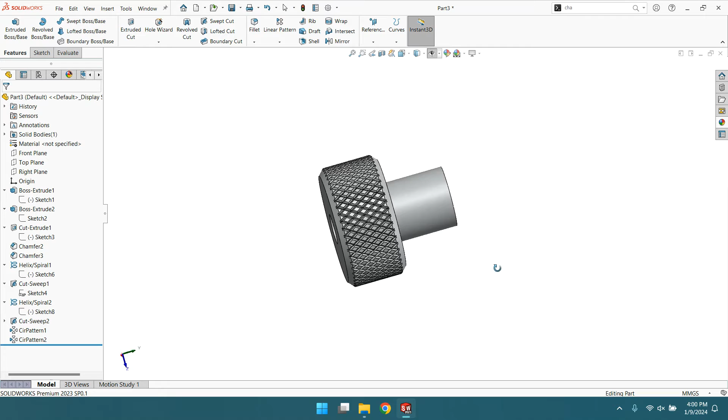Welcome. In this tutorial we are going to create this beautiful knurling in the cylindrical face of our object. Here I have already created this object to demonstrate how knurling helps in getting a good grip on any object in the cylindrical surface.

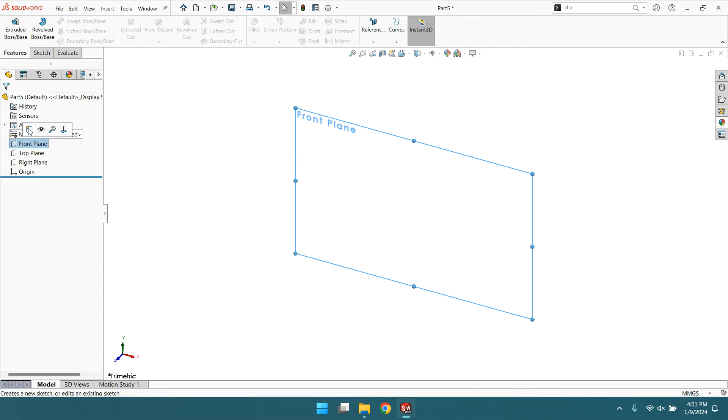Now we are going to create a new part file here. For this I choose the plane and go to the front plane or any other plane to create a cylindrical part. Just create a circle of radius - let's take the dimension, diameter 40, so radius 20.

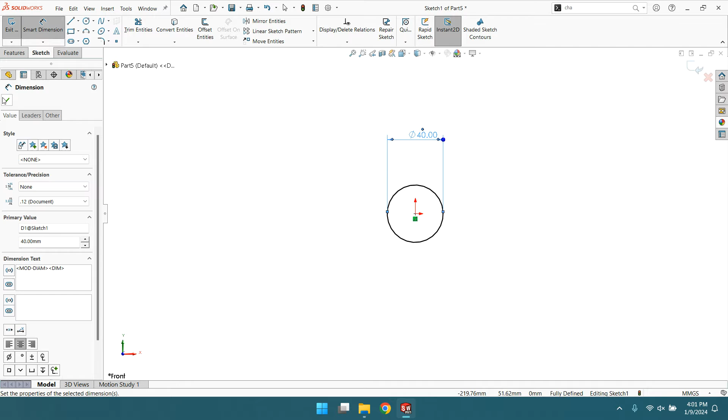Now go to feature and extrude it. You can choose any plane. I choose mid plane and extrude length, let's say 20.

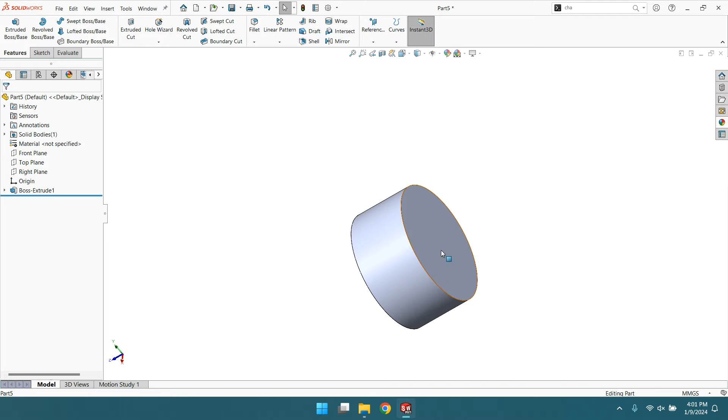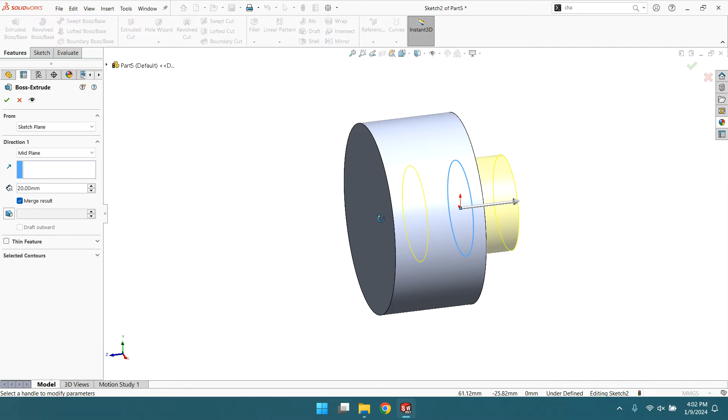Now go to this face, normal, and create another circle. It's just for the shape. Again extrude it, blind 20. Okay.

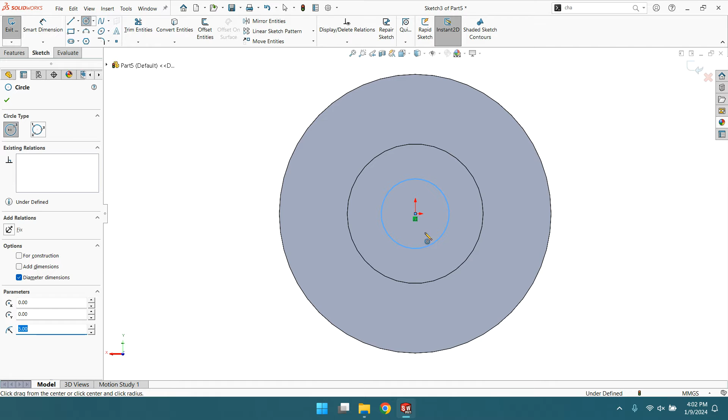Now go to this face and create a hole. The hole gives a specific shape. Go to feature and extrude cut up to through all. You can drag for the random through cut.

Now this gives an idea of this shape where we are going to create the knurling on this cylindrical surface.

Just go to the chamfer and give a 5 mm chamfer. Click OK.

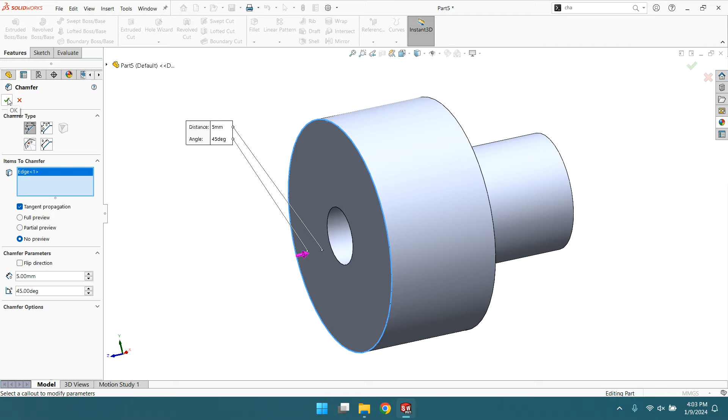This one looks - let's say it's a 2.5. Click OK. Give this side also the 2.5 chamfer. You can always edit as much as you want.

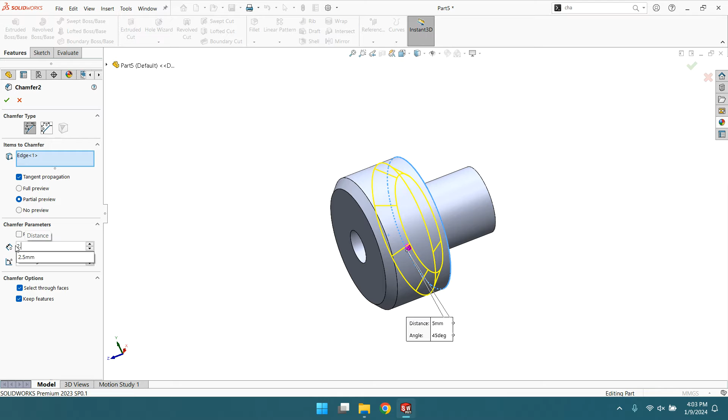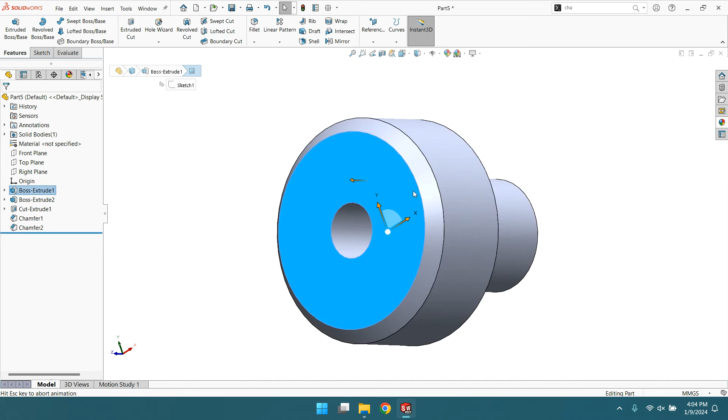Now we have to create a profile and path to cut the knurling. So let's go to this face, normal, and create a base circle for the helix.

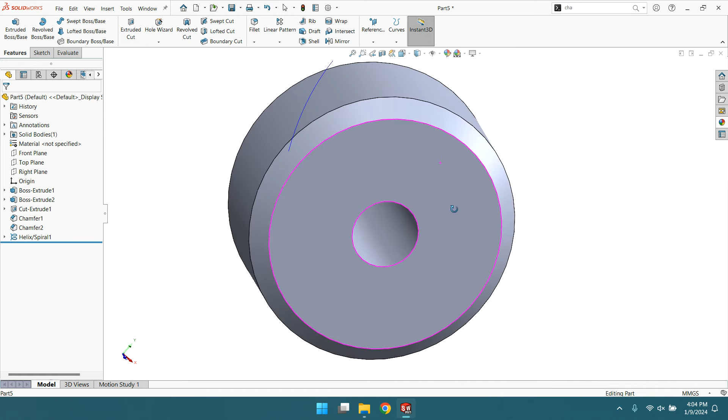Now go to feature and create a helix. Provide the height 20 as it is, pitch is 200, and clockwise direction. You can see the helix path.

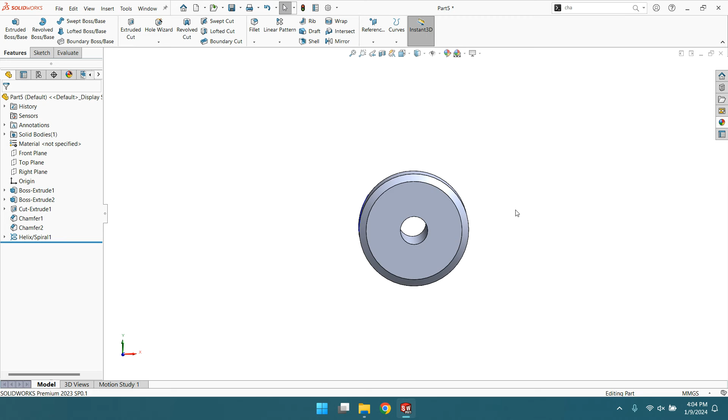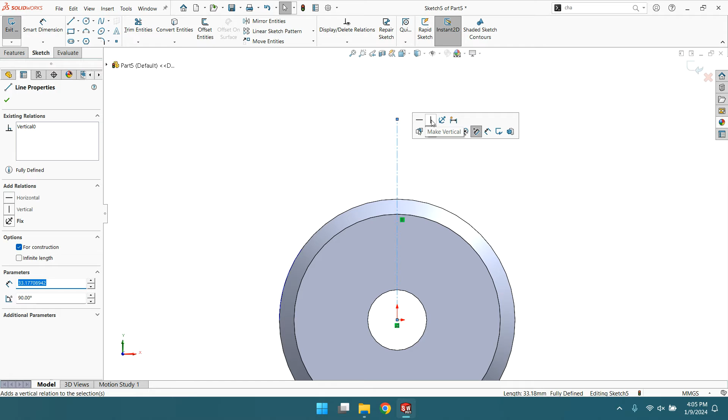You can go to this face, normal, and now we are going to create a profile here. Simply go to the sketch, center line, and draw a center line. Make sure it's vertical. Zoom in.

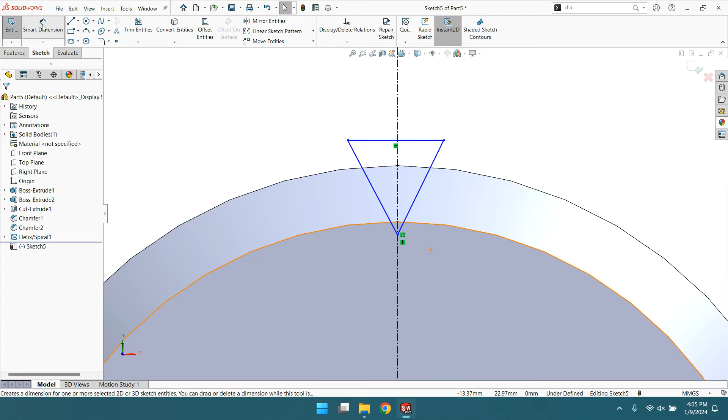Now take a line command and draw a shape like this, shape like a triangle. Go to feature, go to smart dimension. This one, let's say 5.

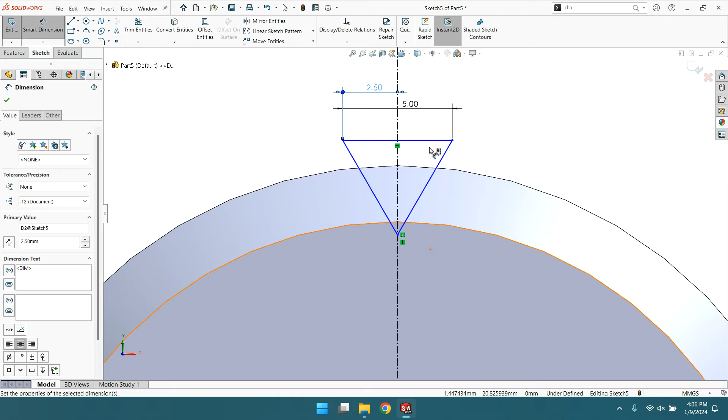From this one to this line, 2.5 means it's symmetrical now. The angle between these two will be 90. And let's define this point from this center point as 19.5.

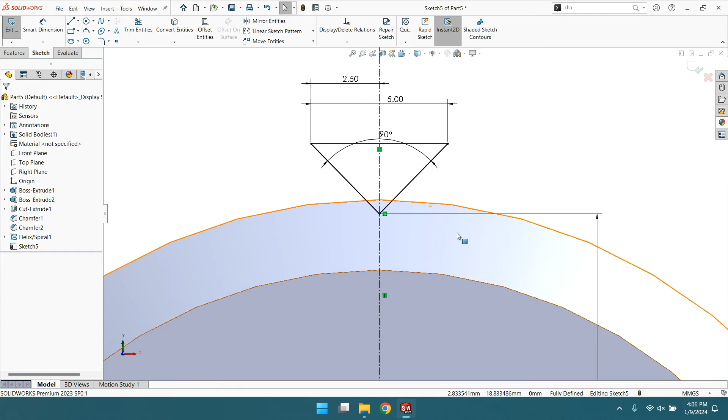19.5. Click OK. The sketch is fully defined. Now we have a profile and the path.

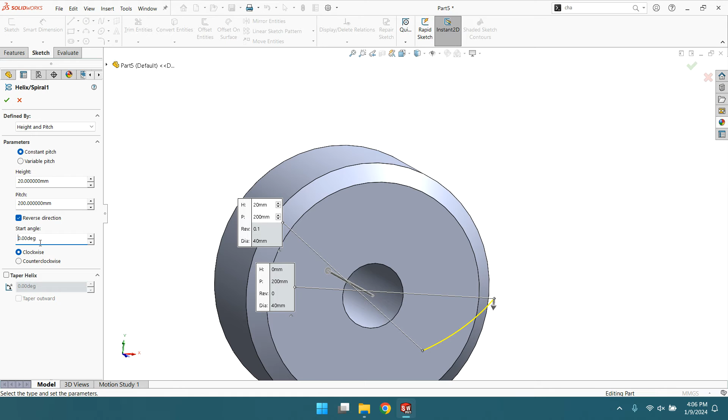Now this is the profile and the path is here, so we can always edit the starting point. Let's say it's a 0, meaning see where it starts. Let's say 90 degrees. Now we have profile and path at the same place.

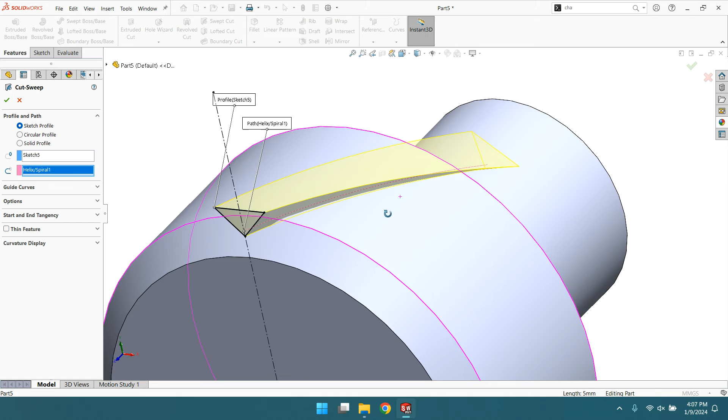Now go to the features and take the sweep cut command. Here you can select the profile - no, we have done it opposite. Select this profile, sweep cut, it automatically takes the command, and in the path select the helix. Now you can see the preview. Click OK.

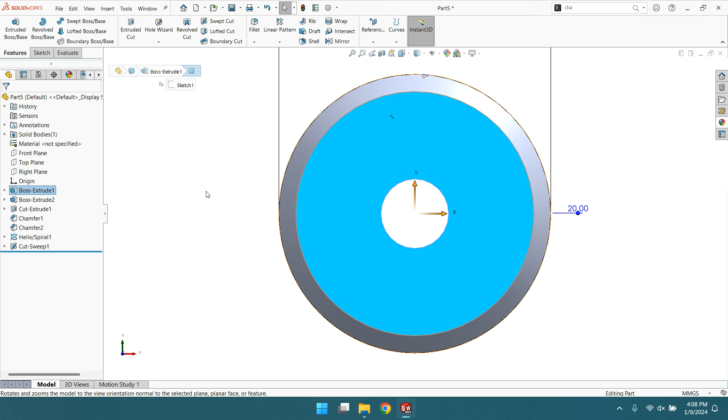Now we have a cut here. We will pattern this cut later, but we want another cut for the cross section just like this. So for this we will again go to this face, normal, and again draw a circle.

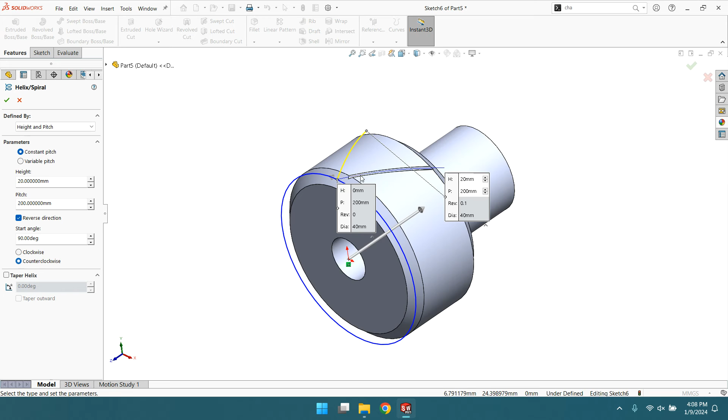Go to feature and create another helix. Now this time keep all the dimensions same, but change the direction to counterclockwise. Now you can see here. Click OK.

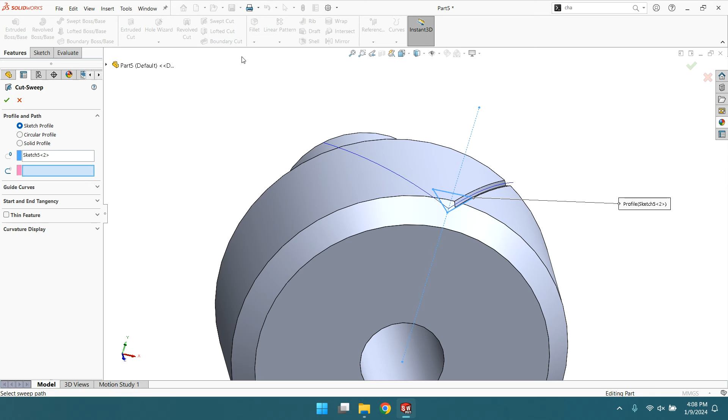Now take this, not this one. Take this sketch as a profile, sweep cut, and this time take this path. Click OK.

Now we have two cuts. Now we are going to pattern these cuts with respect to the temporary axis. To find the temporary axis, go to here and click view temporary axis. Now we will circular pattern these cuts with respect to this central axis.

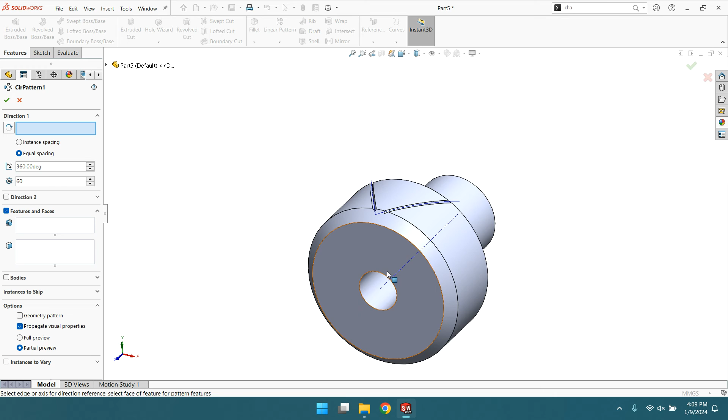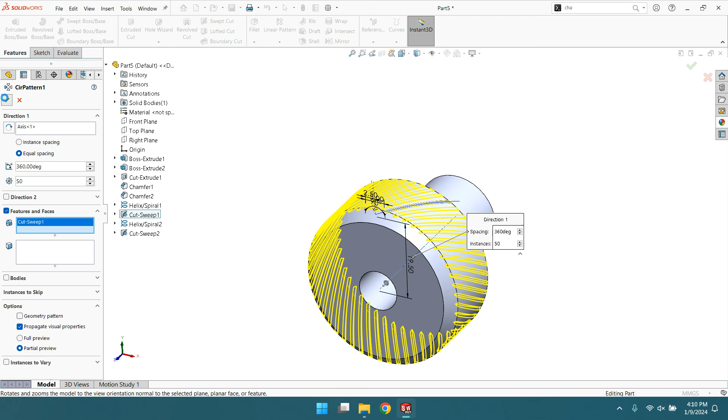Now go to the circular pattern. Here in direction select this central line, and feature to pattern means sweep cut 1. Now you can always change the number of patterns, and the spacing will be equal spacing. Just click OK. It takes time to calculate. Now we can see the patterns.

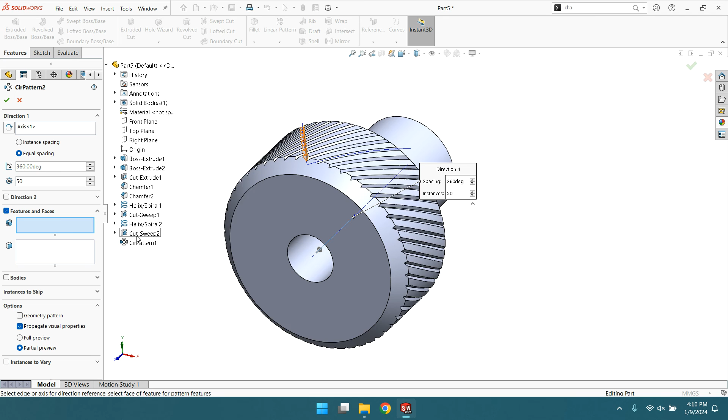Again repeat the process. Go to circular pattern, take the axis as the axis of revolution, and in the feature this time select the sweep cut tool. Now this time you can also vary the number, let's say 50. It takes time to calculate.

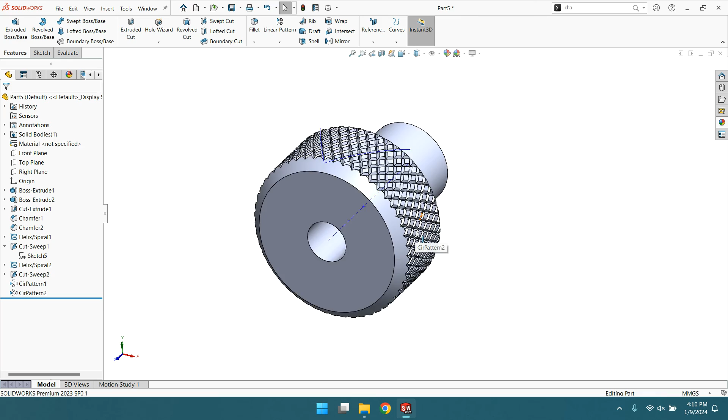Now you can see the beautiful knurling in the cylindrical face of this object. In this way you can create the knurling in any cylindrical faces.

Go to the view - I have hidden the temporary axis and the curves. So this is the beautiful knurling created in the cylindrical face of this object. We can always provide the appearance.